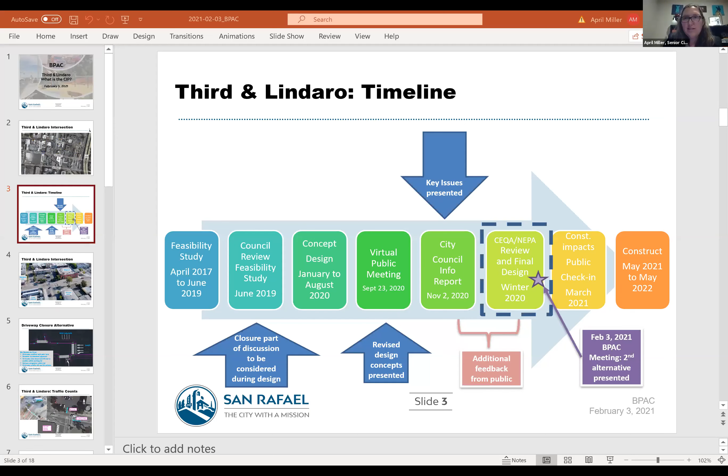Tonight I'm going to go over a couple items, but to start we're going to do a review of the 3rd and Lindaro intersection.

The 3rd and Lindaro intersection is part of the 3rd Street Safety Project. It's actually on the border between the Safety Project and the Rehab Project, and it's in downtown. So let's go over the timeline of the 3rd Street projects and 3rd and Lindaro in general.

Back in 2017 through 2019, the city and their consultants worked on a feasibility study for the 3rd Street projects. Then in June of 2019, the feasibility study was presented to City Council, and at that meeting one of the options brought up to consider during design was the closure of the driveway on the north side of Lindaro.

Between 2019 and 2020, the city worked on hiring a consultant. They also secured some federal funding for part of the projects. Then early last year, concept designs began between the city and their consultants.

In September of last year, there was a virtual meeting to review revised design concepts that changed since the feasibility study. Some of those we presented previously at BPAC regarding the bike path on 2nd Street, which was a change from the feasibility study. In addition, there was also the Lindaro intersection.

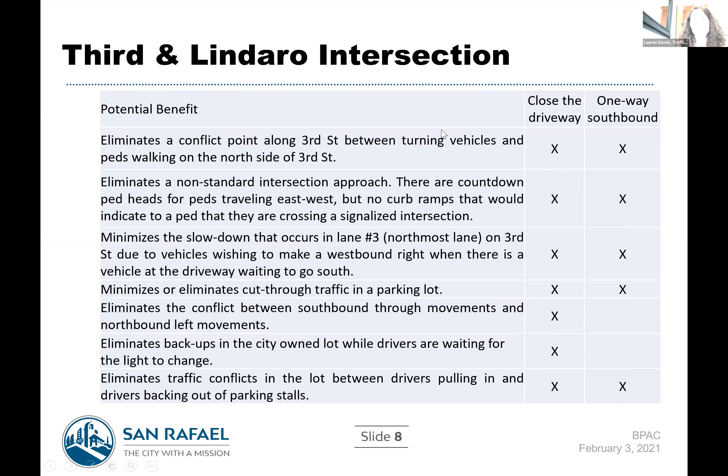I'm happy to help answer that. So if this alternative of exit only goes forward, there's options like you could say no right on red for the exit only, so they could only go on a green light — either they make the westbound right, or they proceed through. And I think that would help with what you're talking about, Jimmy. In theory it would, but in practice, I don't think too many people would pay attention to that, to be honest with you.

DJ, did you also have a question? Yeah, I did. I have a couple questions for staff. First, I'm wondering if we have any data that shows we've had bike or pedestrian conflicts with vehicles at the driveway in the past — if this has been a place where people have gotten hit by cars, or bikes have gotten hit by cars, in the past.

The other question I had was, from a traffic engineer's perspective — I'm not a traffic engineer — how significant of an effect does it have on thoroughfare for vehicles every time a vehicle slows down to make that right turn into a driveway, considering they have to slow down pretty much to 10 miles an hour to make that turn?

So I guess my question is, is this an area where we've had a lot of conflict with pedestrians? And I also want to know how much benefit there is to gain from traffic thoroughfare from eliminating the intersection. It seems to me, from reading the staff report and also comment letters from the public, that the primary benefit from converting it to either closing or an exit is really about vehicle thoroughfare, for the most part, to be honest.

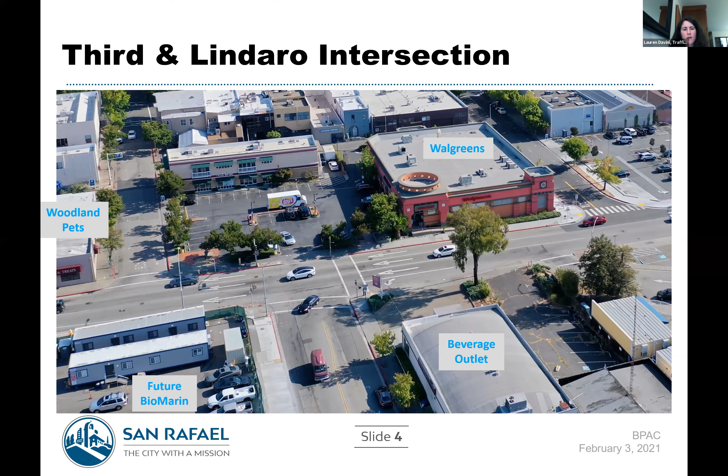I think there's ways you can design it to really prevent people from doing it. If we go this direction, I think we need to do a really good job of letting people know of the changes, so maybe some extra temporary signage when it happens. You can put signs at the driveway that say do not enter, stuff like that.

Change habits. Kevin, did you have a question? Yes, today Lauren.

Forwarded to us two letters from some citizens complaining about or expressing some concerns about the proposed changes. I think April just addressed one of those comments. I'm wondering if staff could address the other comments so we could get a perspective from the city staff standpoint.

Yeah, so we had two folks write in today. I forwarded their correspondence to the BPAC members. I didn't get them posted today, but they will be up very soon after this meeting, probably tomorrow. But some of the concerns, I'm sorry, I can't summarize it right now. I don't know if any of the committee members want to comment on or summarize what those concerns were.

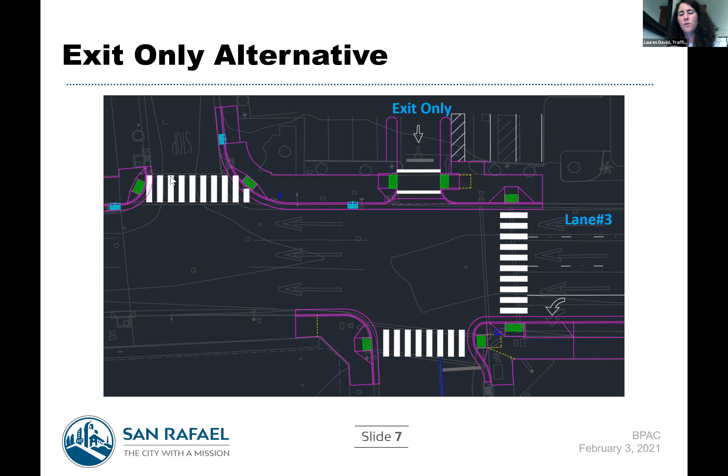I know one of the biggest ones is by closing it entirely, if you're someone trying to exit from Walgreens and you want to go home to Gerstle Park, or you want to get to Highway 101 South, you can't go straight. You wouldn't be able to go straight down Lindaro. You'd have to loop, make a few right turns and loop around in order to get to 101 South. And by making those additional turns through intersections, you're increasing the number of vehicle pedestrian conflicts. And I think that is with closing it, but if it's one way exit only, a lot of those issues are resolved because they can continue to go straight down Lindaro and continue on to 2nd Street or south on Lindaro.

And Phil, did you have a second comment? Yeah, I did. My comment was, or question, yeah, a question for staff.

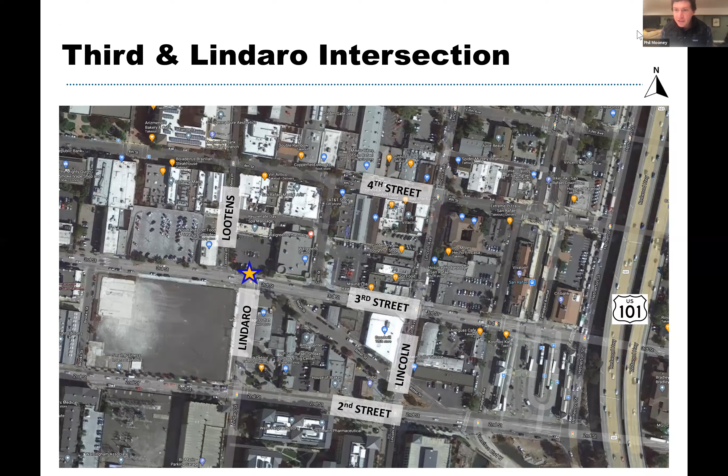You had the numbers of vehicles going through that intersection. I'm curious when you took those peak numbers and if that was before or after the Francisco Boulevard West project. The reason I ask is, if you remember with Francisco Boulevard West, we are now routing vehicles around that are traveling north through the city, probably primarily onto Lincoln, but also onto Lindaro and onto Andersen as they continue to move north. So one of the things we discussed with that is that we're pumping more cars that are going to go north on these other roads, mainly Lincoln, but also potentially Lindaro. And if that's the case, I think if they're going north, the natural thing they do is be going west on 3rd Street. So potentially more traffic turning left there, driving north on Lindaro, turning west to go out on 3rd Street. In which case that left turn could potentially back up and would be slowed down by this exit, so it would be slower for most traffic. So anyway, that's why I was wondering when, I guess my question for you is when those numbers were taken.

That's a great comment. I referenced it in the report. These counts are an average from counts taken on a day in 2016 and 2017, because I didn't want to take, we have more recent counts, but given COVID and the very kind of, we don't know what's normal from last year, I thought it made the most sense to go back to something where we had typical conditions. But I didn't think about the reroute of Francisco West. That's a good point.

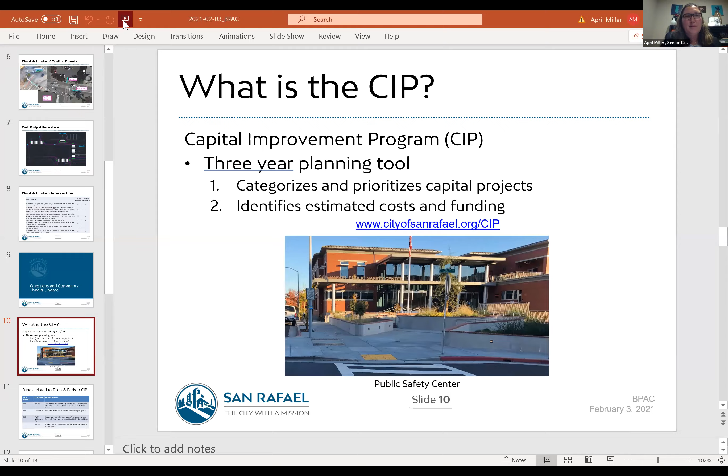So city staff just wanted to go over what our CIP is, because it's the time of year where we start looking at our capital improvement program. It's a 3-year planning tool, which, as you can see, we categorize and prioritize different capital projects within the city. This is about the time of year where we start to look at different projects that could be included in this 3-year planning tool.

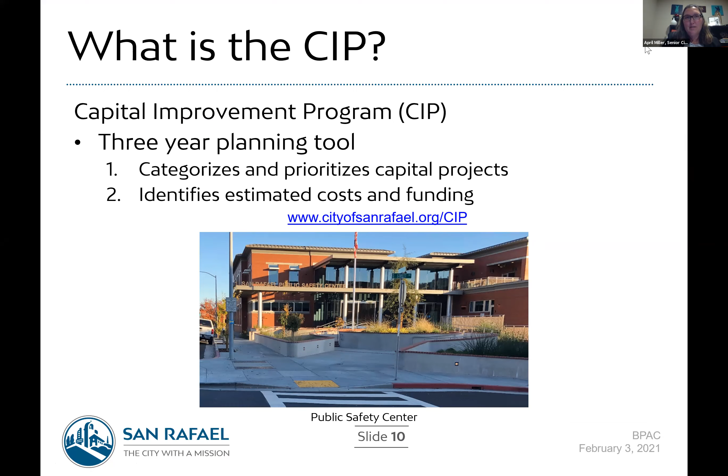This fee is charged to developers, and that fee can be used towards projects that are in the general plan, which are involved with circulation-related issues. And as always, the city is always looking for different grants that help us do additional projects.

So the CIP process—how does a project become a project? We receive projects from our maintenance crews or other city departments that are not public works. Sometimes there's public inquiries about different potential projects in the city, and those make it to a list to be reviewed, and also grant funding opportunities. If there's certain grants that come up, sometimes that sparks a project based on what those grant requirements are looking for.

Once we have a list of projects, which is ongoing, plus additional things from the last year, we have a working group that ranks the projects. This group is made up of all the different departments within the city, and we look at the projects on this list and rank them. Then once we rank them, we review our funding based on the top ranked projects, and then we create our 3-year plan.

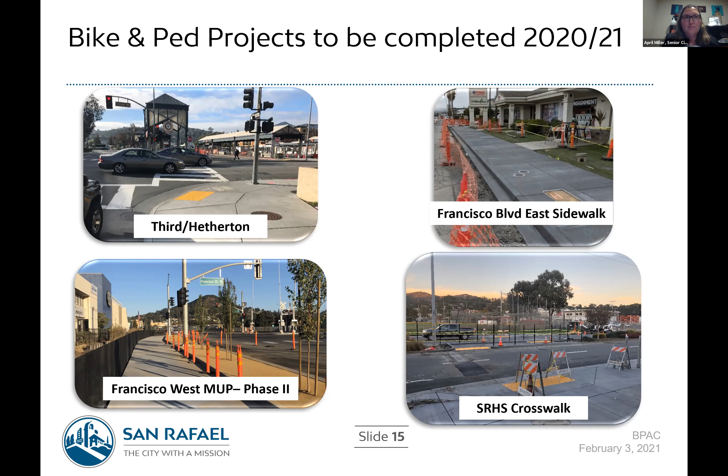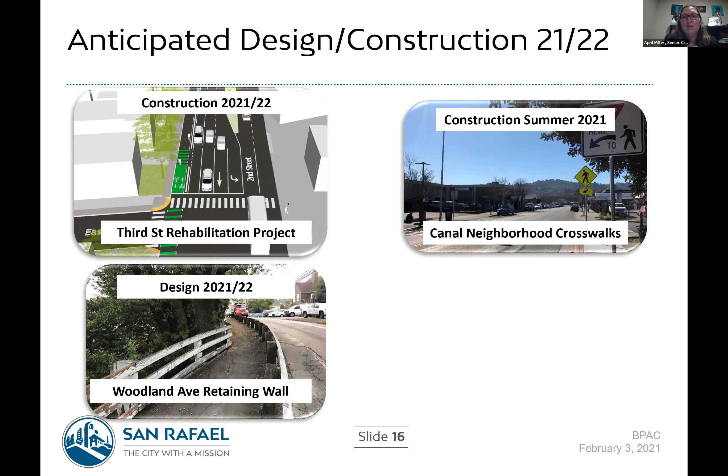One of the projects currently set to be designed next year is the Woodland Avenue retaining wall and sidewalk project, which was part of our CIP document last year that we're set to design. There's a few more—this was just an initial list of projects we know are in the queue.

So I don't know if anybody has any questions on what the CIP is, but this is just a quick overview. I'll stop sharing.

April, I have a quick question for you. Do you monitor sales of electric bikes and the transition we're having from cars to more people on bikes these days?

When we're planning? I don't specifically monitor that. No, I don't. But I mean, I know that in general, the world's going to move more towards bikes, just from what I've been hearing, but not about electrical bikes.

Okay. Are there other questions? I'd be curious if we could get some data on sales for electric bikes and what the projection is.

Tyler, you had a question. Before we open up to public comment, this is the time for questions of staff, and then we will again offer our comments at the end. Tyler, did you have a question? Yeah, by the way, Phil, send me that too.